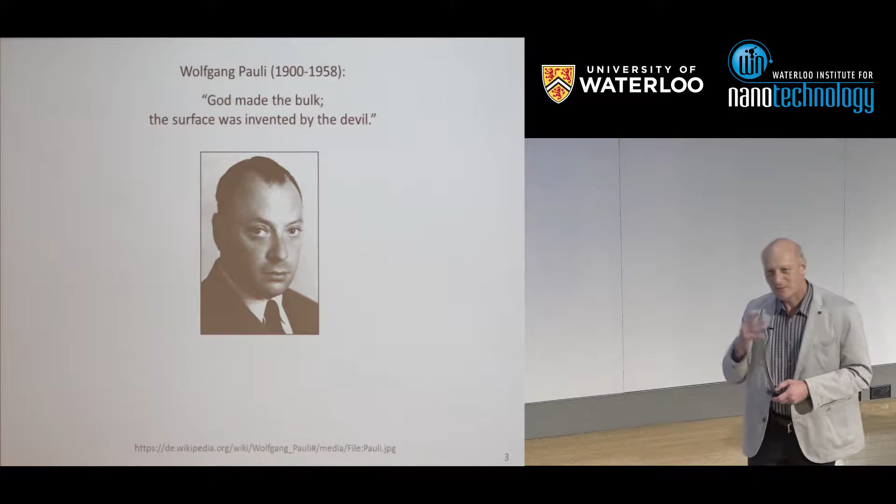So wetting is often determined by what happens close to the contact line, from the atomic range to, I would say, 100 or a few hundred nanometers.

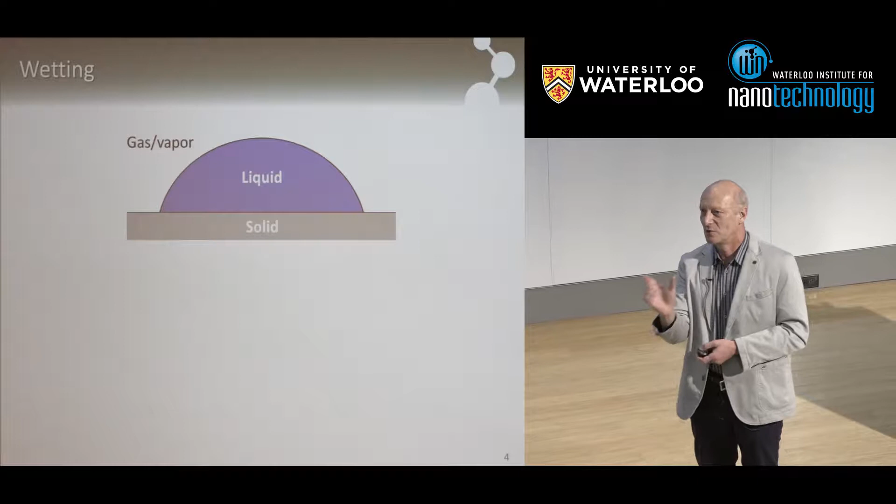Now you might wonder why, because if you think about wetting, in textbooks you will find this equation attributed to Young, which is based on the experience that if you take a surface and place a liquid drop, and if you take the same material, flat and smooth, and place the same liquid, then roughly you get the same something like, which is called the contact angle, the angle between the solid-liquid and the gas-vapor interface. So that is something which experience tells us, at least roughly.

If you do the thermodynamics, you'll find that this contact angle is in a very simple way related to the interfacial tension of the liquid and the interfacial energy of the solid-liquid and free solid interface. So this is what you find in textbooks, and this is basically what all science about wetting is kind of rotating around. And this is certainly true for thermodynamic global equilibrium.

So if your system is in equilibrium, then this is it. Unfortunately, you cannot even measure precisely this equilibrium contact angle. If you measure contact angles, it is something in the range between an advancing and a receding contact angle, but there is no way of measuring the equilibrium contact angle without certain assumptions, which is a pretty bad situation. This is one of the fundamental equations in surface science, but there are two things which you cannot measure.

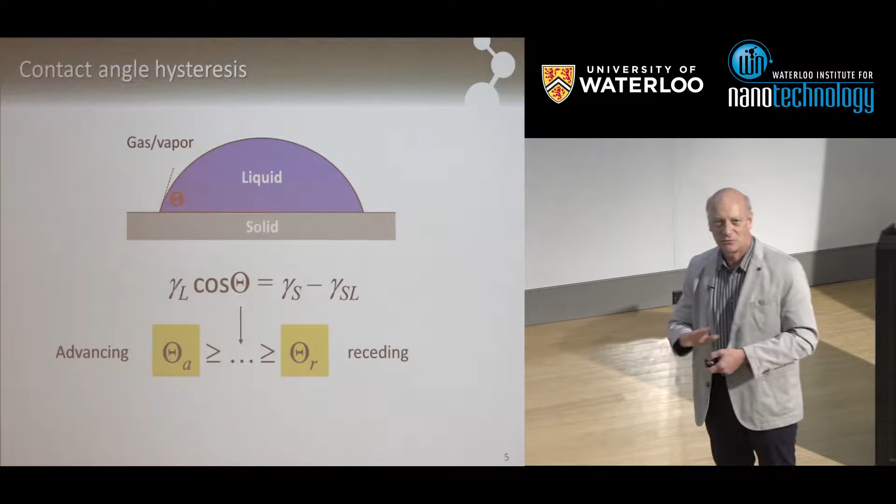Now, this wouldn't be so bad if the range is small, but typically the range is like 20 to 30 degrees at least. So even on very smooth materials, you will not get below 10 degrees, I would say. So the range is huge, and you cannot measure the equilibrium contact angle.

That's kind of nasty. So this is one way of measuring it: you take a drop, put it on a tilted plane, and wait just before it slides down, measuring advancing and receding on the front side and on the rear side. This is how it's done. This also depicts where the contact angle difference may become relevant. In fact, the larger the difference between the advancing and the receding contact angle, the more the drop resists sliding.

So if you think about drops on a windscreen or glasses, you would think, oh, this is really nasty. Not only does it spoil all our theory of contact angle hysteresis, but it would also be nice to have these drops just sliding down so you have a clear view.

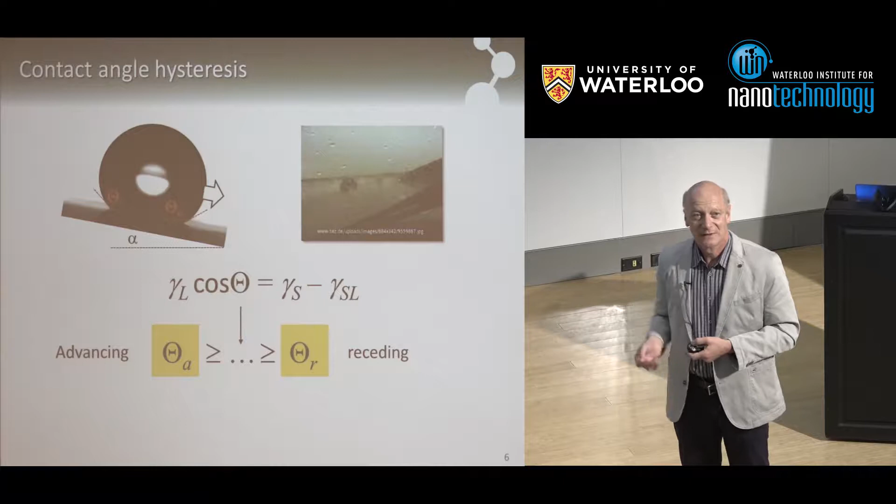However, if you think about all those phenomena in life and industry where wetting is important, you'll find that for many applications it's really desirable to have a drop not sliding. Think about printing, painting, coating, or bringing out herbicides and insecticides. In most of these cases the absolute contact angle may be relevant, but what's even more relevant is the difference between the two.

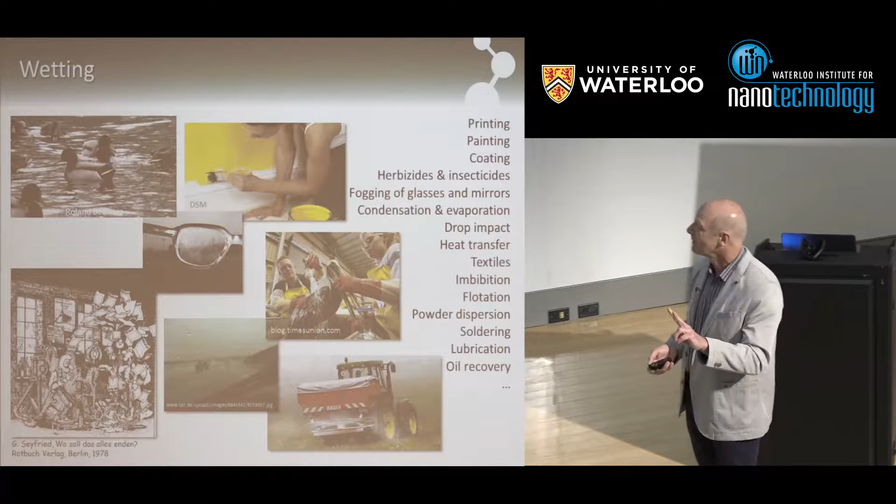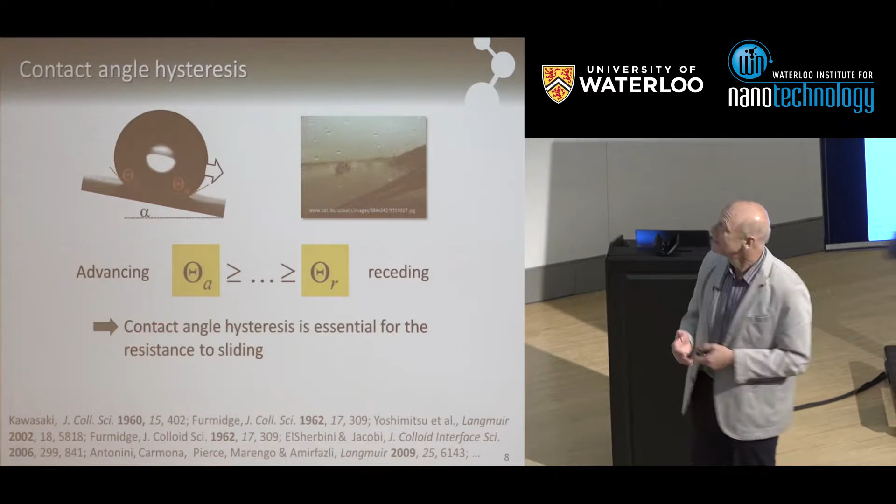Coming back to this situation, it's a nuisance that we cannot determine the equilibrium contact angle and cannot make use of Young's equation as we'd like. But in reality and in nature, the difference between the two contact angles is probably even more important than the equilibrium contact angle itself. So contact angle hysteresis is essential, not just a nuisance, for our life and everything surrounding us.

Maybe I should go one more slide and compare it to friction. So contact angle hysteresis is providing something to drops which friction provides to solid surfaces.

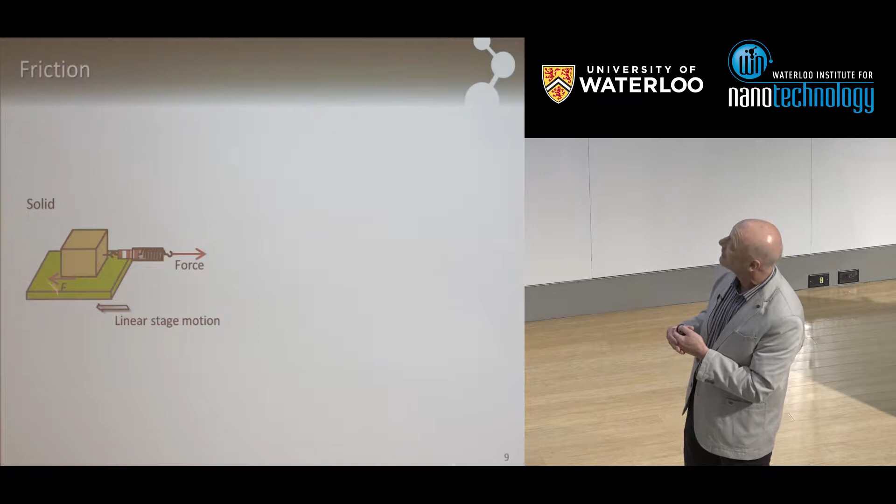I guess you all remember this boring experiment from school, where you place a solid block on a flat surface and start pulling on the block until it starts sliding. So there's a surface, and in this case we start sliding the surface. The block is attached to a spring, so you pull until a certain force is reached—depicted here, force versus time. You start pulling, and at some point the block starts moving, then the force decreases and comes into equilibrium. This is one of these 300-year-old friction experiments.

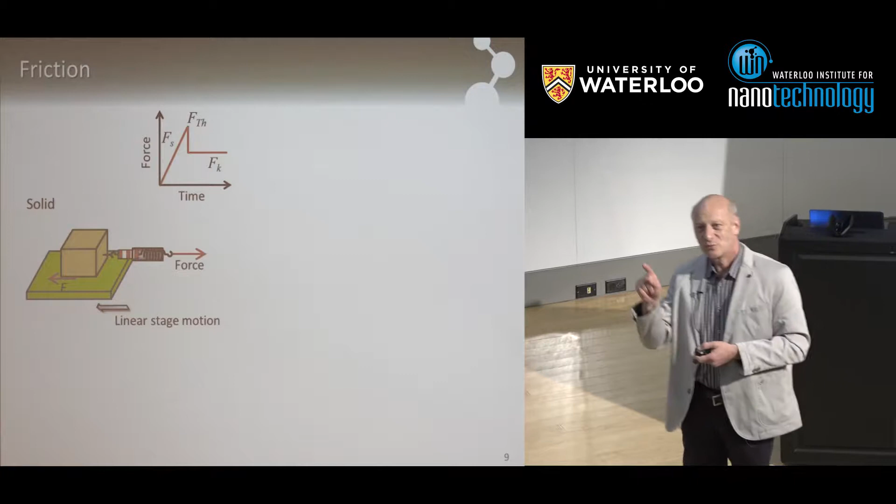Again, I guess you'd agree this is relevant for everyday life—without friction, life would be very different. But there is a difference between static friction and kinetic friction. This is what electronic braking systems in cars are based on, so that you use this peak and don't get into sliding.

We did the same experiment with a drop, because there are many similarities between sessile drops sitting on a surface and solids. Dominic Pilat, during his PhD and Nan Gao as a postdoc, did a very simple experiment. He took a flat surface, placed a drop, and kept it in position with a capillary spring. You start pulling on the surface, and at some point the drop starts sliding, and we measure the force with this micro capillary. The result is what we expect: force versus time, you start pulling with the drop, but at some point the drop starts sliding, and this is determined by the advancing and receding contact angle. That's what theory says.

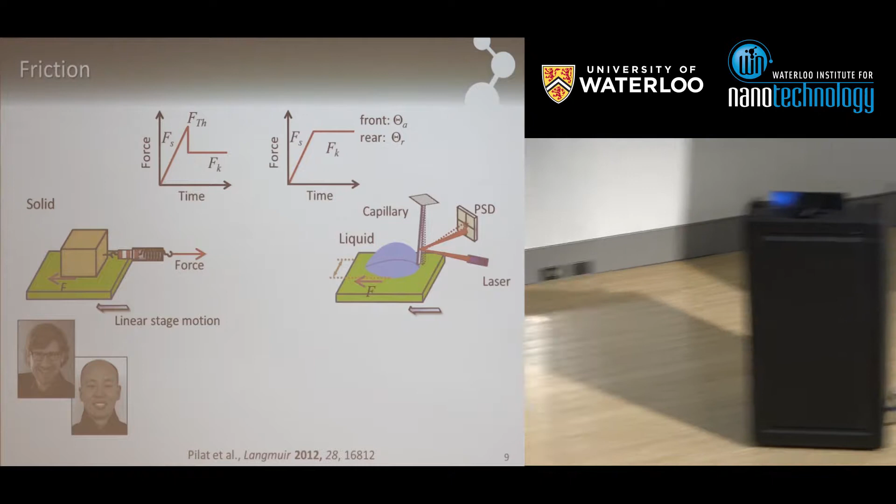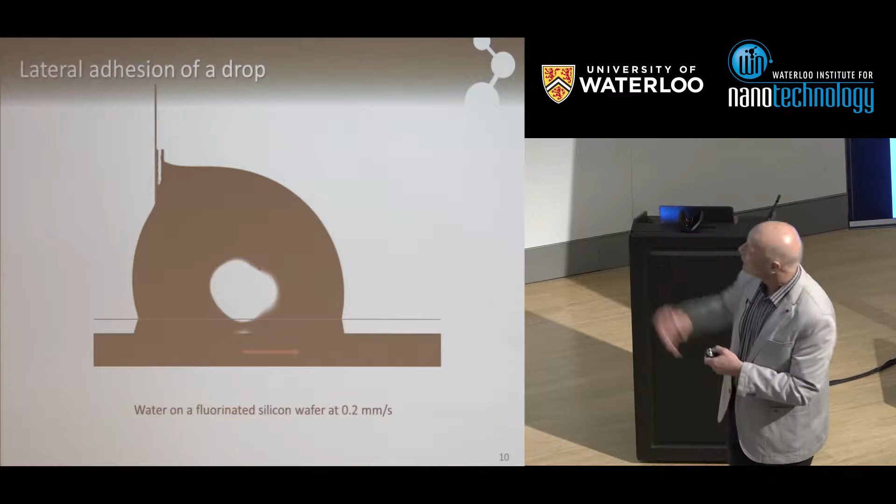Then we did the experiment, and I must admit I was even ashamed doing such a simple experiment. Here's the drop, here's the solid surface which we move in this direction, and here's the micropipette—this green thing is only a reference. As we start sliding, the drop is still moving with the surface, then the drop starts sliding and settles into an equilibrium position. You can see the micropipette is deflected, and from that deflection we measure the force. It's conceptually as simple as this, though I should warn you it took a year for a very talented student to make this reliably working. But the concept is pretty simple—a very simple experiment.

The outcome is plotted here: we have force and time, and like in solid friction, you see an increase until the drop starts sliding, and then you see a decrease again.

Even for drops in these very simple experiments, they don't behave as we expect. There is a static lateral adhesion or friction, and there's a dynamic part. We need to distinguish between advancing and receding contact angles, but I don't want to focus on this subtle difference. What I want to bring around is that contact angle hysteresis is important, and without contact angle hysteresis, we would have a problem with friction.

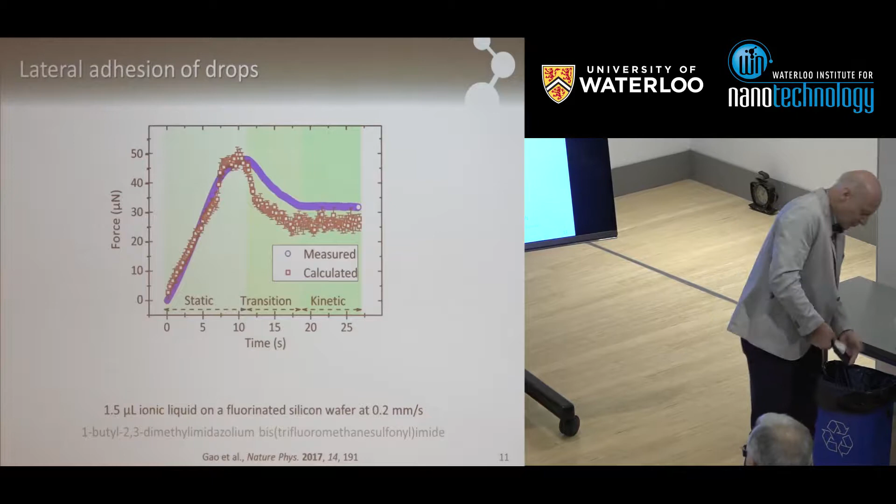Just to give you an impression of what happens, and we see this every day in the lab: the simple task of placing a drop on a surface. Sounds very simple. Here I have a surface which is, as I'll discuss later, superhydrophobic, and has a very small contact angle hysteresis. I'll pass this around so you could try placing a drop and keeping it in balance, just to get a feeling of what happens when contact angle hysteresis is low. This is not even close to zero, it's just low.

In case there's too much water around, there's something to dry it with. Please be careful so you don't spill too much on your neighbor. Maybe I can pass it here. I need this thing back because I borrowed it from the hotel.

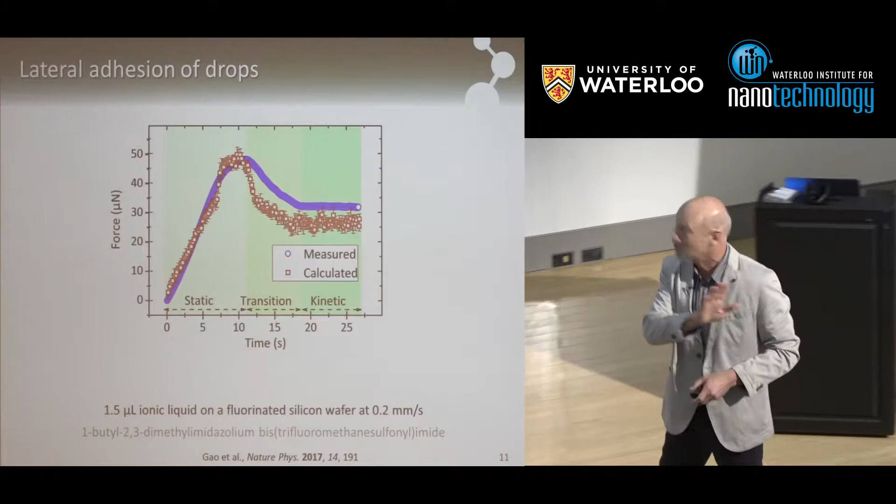So, just to give you an impression of what the world would be like if friction between liquid drops and solids is low, and this is not close to zero.

Let me make the last general remark on wetting. I started with the ideal surface—this is textbook, and I must confess even our own textbook basically stops here. For the ideal surface, using Young's equation, things are in thermodynamic equilibrium, global equilibrium. In fact, we don't need any nano here—it doesn't matter what happens close to the contact line. Young's equation is valid irrespective of the details close to the contact line or at the macroscopic scale.

Unfortunately, there's something like contact angle hysteresis, dynamics of contact angle, all these things. So there's a difference between the two, and then you need the nanoscale, because all these deviations happen close to the contact line, and we don't really know what is happening there. The main problem right now is that there's no way of looking with a resolution of 100 nanometers or better at what happens at the contact line. There's just no method of looking at it. Optical microscopy is quite good, but resolution is a few hundred nanometers, and that's not good enough. We are really lacking methods to understand more closely what's happening in this range between the advancing and receding contact angle.

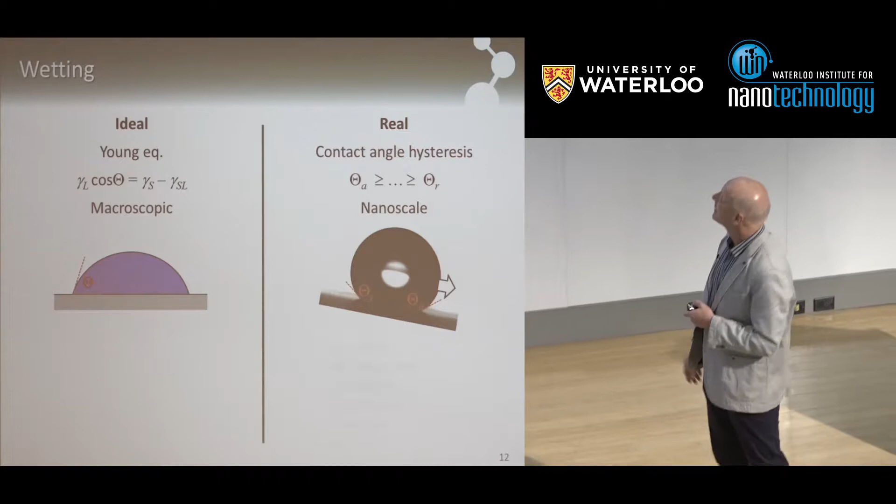People know why there is hysteresis. There are some reasons like roughness and heterogeneity that have been studied for 100 years. Right now the focus is more on adaptation, deformation, charging. Fernando is one of those people who knows best about this. It's still an active matter of research and will be for a long time.

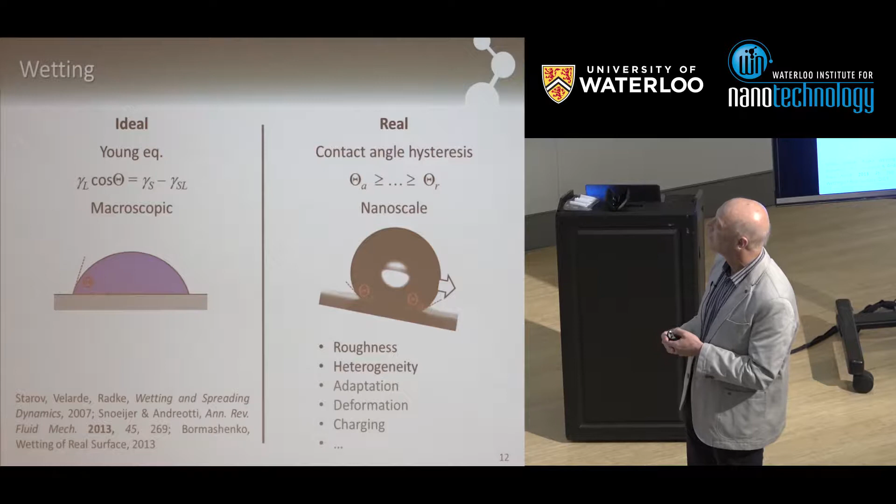Now let's focus a bit on what the title was about: nanostructuring surfaces to control wetting. Though we don't really know what happens at the nanoscale, we can still make structures and see how this influences wetting. I would like to determine wetting by making a specific surface, and in particular nanostructuring it. I'm looking at repellency because making surfaces liquid-loving is easier, particularly if you don't have water—you can make oils easily spread, so that's not a real challenge. Making liquid-repellent surfaces is more challenging.

Let me start with water. I take a flat surface, place water on top, and even if this is a fluorinated surface, the contact angle is something like 120 degrees, maybe 125, but not much larger. And it cannot be larger, for fundamental reasons.

Of course, we know there are situations where, if you place a drop, contact angles are much higher. A lotus leaf is one example. Here is another example: birds' feathers, or the fur of mammals. Birds clearly rely on the fact that their feathers don't get wet—it's completely essential. If they get soaked, they cool down and would freeze to death very fast, and they can't fly. So they depend on super-liquid-repellency, not only water birds.

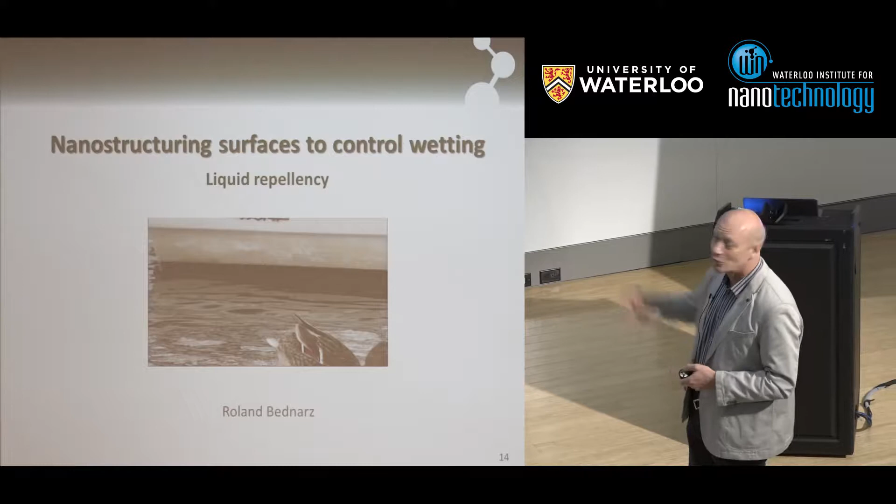People studied this effect of very high contact angles, called superhydrophobicity. The first artificial surfaces, at least which I know, are from Robert Wenzel, who took paper and coated it with a fatty acid or other organic acids, and observed contact angles of 170 degrees, so very high, almost a sphere, rolling off easily. He already speculated this is probably due to roughness.

So flat surfaces don't have high contact angles. If you make rough surfaces, they do. So he already had the idea that this roughness, quantitatively, was not suitable to fully explain this situation.

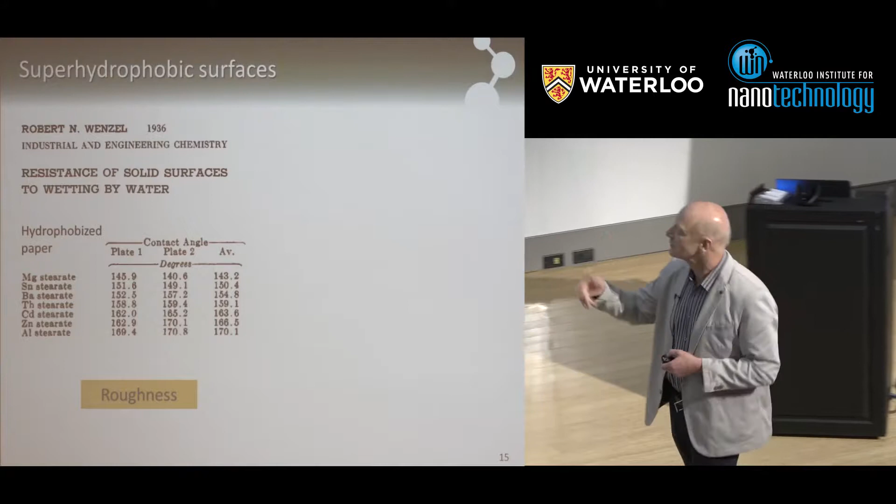Quantitatively, Cassie and Baxter came up with the right idea. The idea they had was that the liquid is not in direct contact with the solid, but the surface is structured so that underneath the drop you have some air. So basically, even underneath the drop you have an air-liquid interface rather than a solid-liquid interface. That's still the main effect.

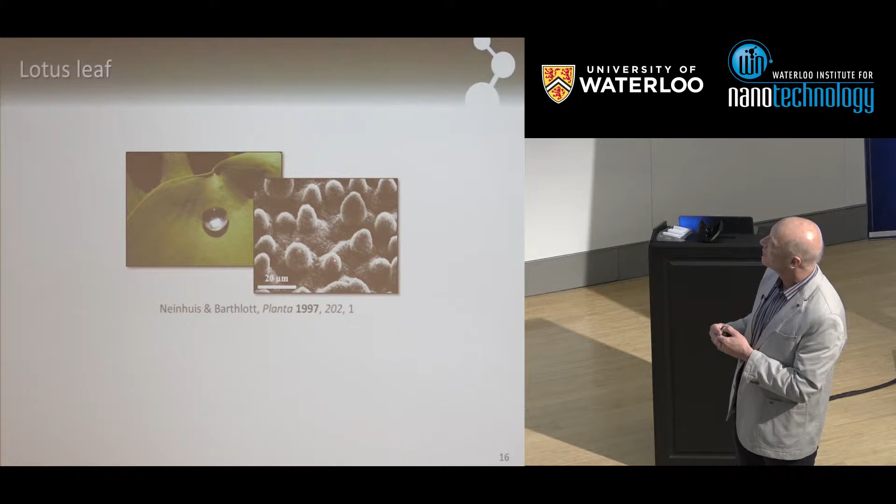You need to make a surface with protrusions, and the protrusions need to keep the liquid away from the substrate. Now we can have a look at the Lotus leaf with the electron microscope, and you see these protrusions sitting on top, clearly a kind of wax, so that drops are sitting on top of those and roll off easily. So the idea of Cassie and Baxter is conceptually definitely right.

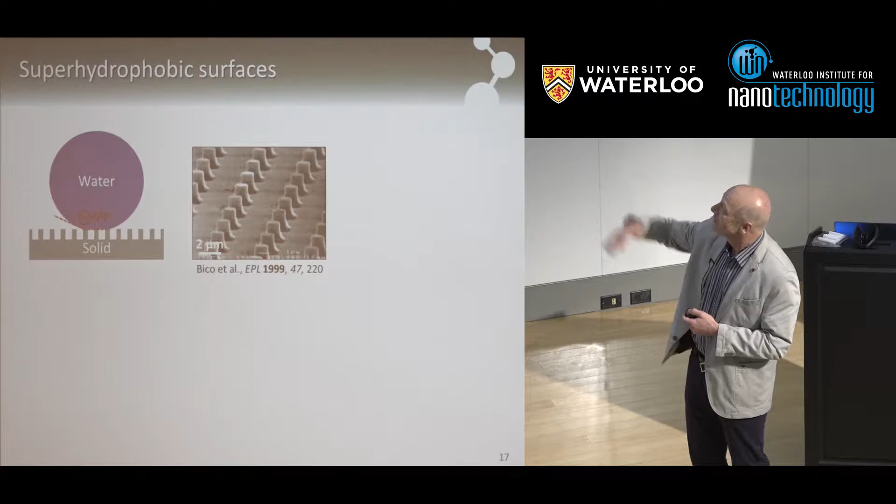Here's the standard model system. When people study superhydrophobicity, they like model systems where you can do calculations. This is from David Quéré's group. They have micropillars a few microns in size. The idea is, after hydrophobizing them, the water drop, if placed on top, will only touch the top faces but will not reach the substrate. The effect, by the way, is not due to hydrodynamic pressure, it's capillarity.

That's the same effect which holds a drop in place generally - the drop is kept at this position and doesn't fall down because surface tension is keeping it up. The same happens in superhydrophobicity: water sits on top of these pillars and surface tension kind of keeps it up. There's a vertical component of surface tension which prevents the water from touching down.

If you press on the water, applying a high hydrostatic pressure, at some point you'll exceed this angle of, let's say, 120 degrees, and water will slide down. But as long as you don't, things are fine.

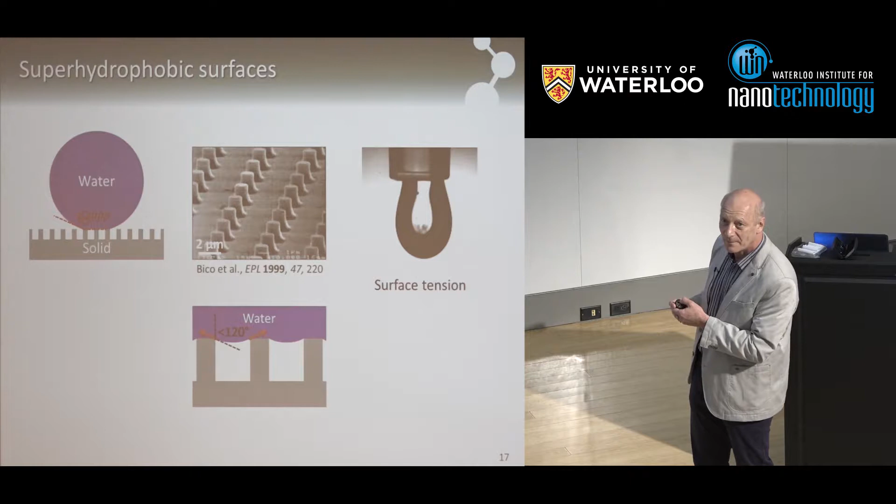Now let's be more quantitative. What is superhydrophobicity? It's a matter of definition. If you look into textbooks, people define superhydrophobicity with two criteria: one is the advancing contact angle should be above 150 degrees, and the second is if you tilt the plate, water should run down if the tilt angle exceeds, let's say, 10 degrees. You need to specify the volume of water, but that's easily done. So these are the two criteria you find in texts or reviews.

Unfortunately, it's very difficult to measure contact angles above 150 degrees. If you place a drop, you have to keep it horizontal and watch around the surface carefully - you easily make errors in tilting and these things. So it's very tricky. In fact, we started doing quantitative experiments when, in discussion with students, they reported: I made a surface, 160 degrees plus minus 5.

I complained, why are your errors so large? You have plus minus 5, while in the literature it's plus minus 1, like with normal contact angles. They said this is impossible to do better. We discussed back and forth, I complained, and they said it's not possible. But then they persuaded me that it's not possible to measure contact angles, if they're very high, much more precisely.

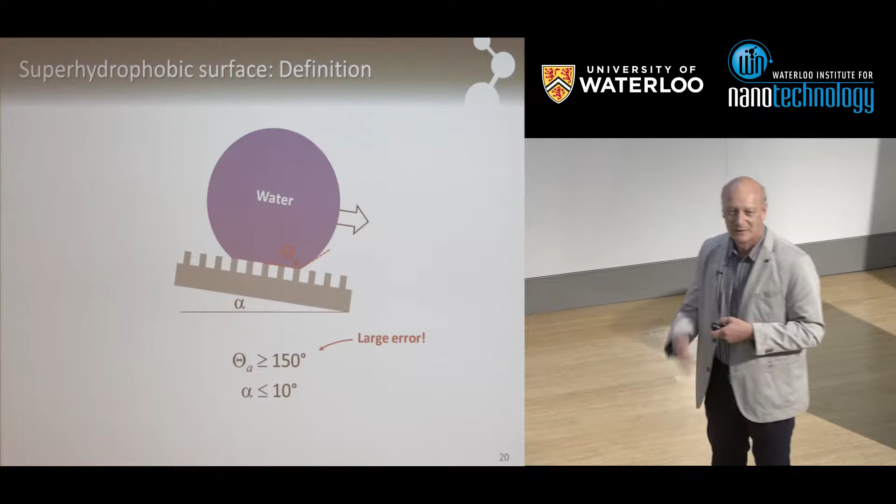And you find this even in the literature. So it's very difficult to use this criterion because it's difficult to measure. Adhesion experiments, by the way, are much nicer.

So you could do the simple experiment like the drop jumping up and down. You could take a drop, bring it into contact with the surface, pull it back, and measure the force required to pull it back. Much more sensitive, much better.

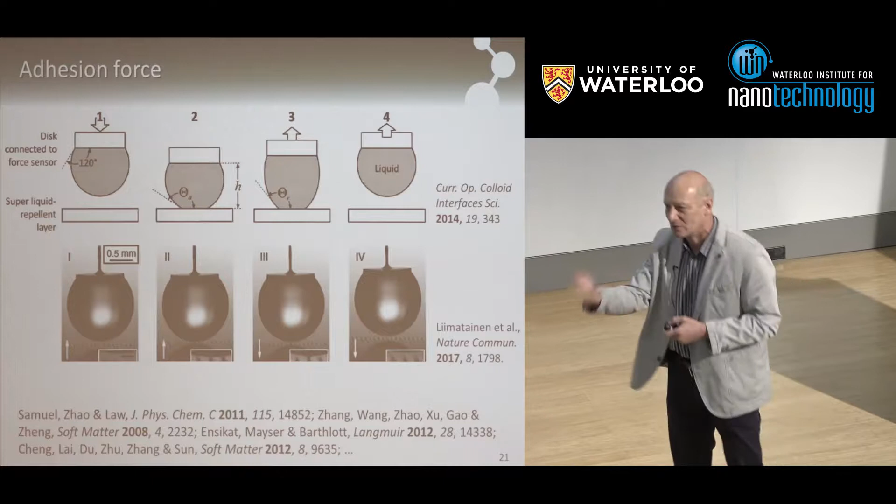Here is an example from Robin Ras. He developed a device, I think that's even commercial. He took a drop, brought it into contact with a superhydrophobic surface, pulled it off, and measured the force. From the force, when pulling back, you can calculate the contact angle, and this is a very sensitive way of characterizing these surfaces. By the way, they already go for the receding contact angle. For adhesion, the receding contact angle is important, not the advancing.

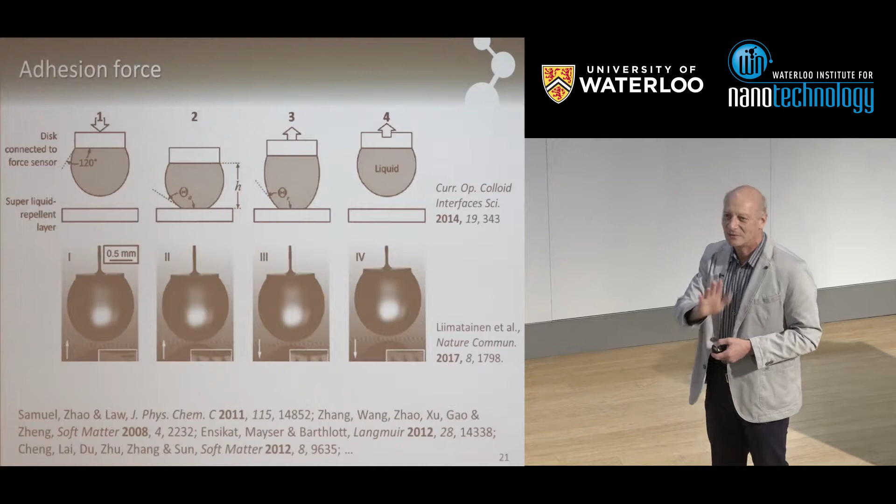This is a nice way, but not very simple. You need a special device, and the forces are low, and it's not simple to run, not as easy as a contact angle measuring device. So we were looking also for other ways of characterizing superhydrophobic surfaces.

And one we found, I wouldn't say by coincidence, but we found an easy one when asking a completely different question. The question we asked was, how does a drop advance and recede on such a structured surface? So what happens at the front of a drop and what happens at the rear?

And we used the method which is, I mean, probably the one with the best resolution you can get. That's the confocal microscope. So we look with the confocal microscope from below, and we look underneath the drop at what is happening. We used as a standard sample one of those microstructured micro-pillar surfaces, like David Quéré did, like many people do. So there's these micro-pillars, a few microns in size and a few tens of microns in spacing. Place the water drop on top, and you look with a confocal microscope from below.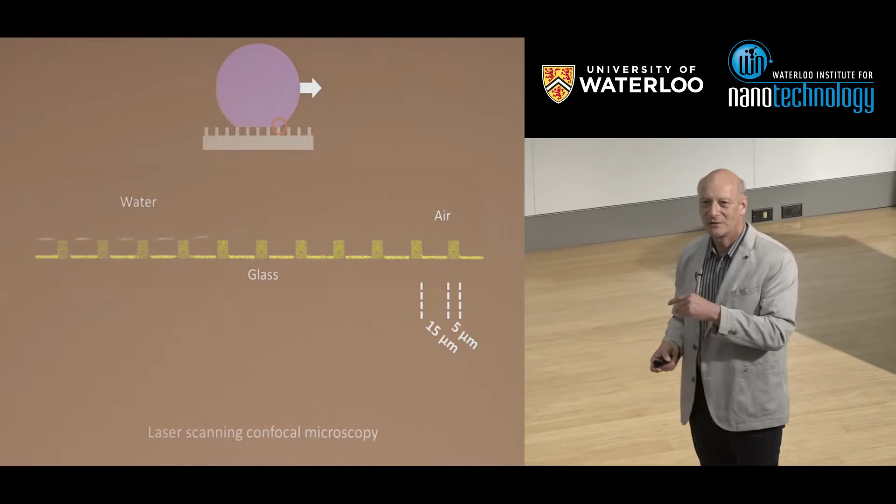In fact, we don't use any fluorescent labels. Confocal microscopy is made to image fluorescent things, but we use the reflected light, so there is no fluorescence here. What happens is the light, which is usually used to excite fluorophores, is also reflected at the glass-air interface, and that's shining yellow. These are the micropillars, but this is not a true optical image.

We placed them artificially because optically this doesn't look attractive, so we replaced the pillars by these green squares. So that's not a true optical image. What is again true is this yellow line here, which is the bottom side of the drop. And again, light is reflected when you go from air to liquid. This is why you get this reflection from underneath here. So this is the water drop, this is air.

Now maybe difficult to see, but there's also some yellow light coming up here. And of course the reflection here is higher than up here, because if you have a planar surface, then more light is reflected than if it's tilted. When you tilt, then most of the light is going away. But I hope you still can see the front of the drop.

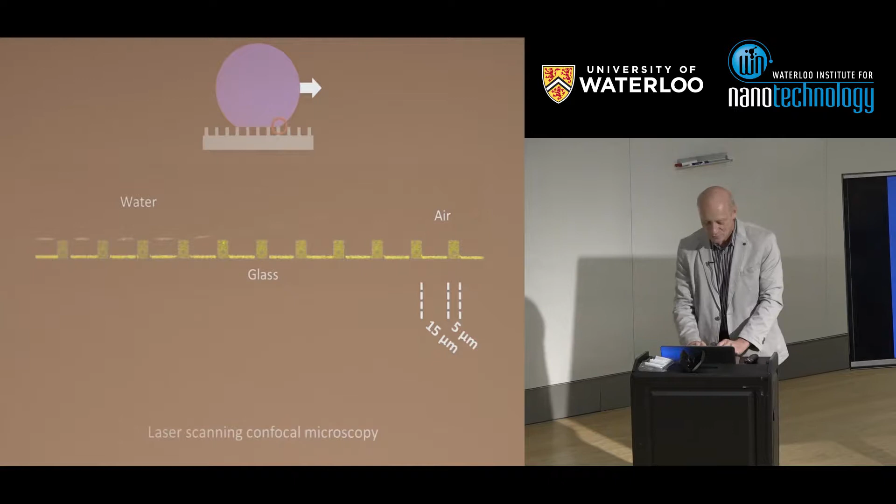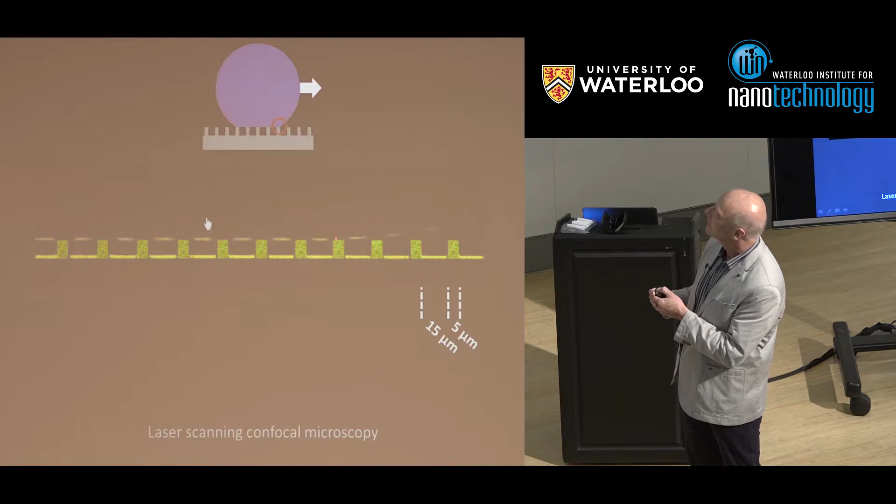Now let me try starting this movie, and then we watch from below with the confocal microscope at what's happening. Does it move? Yeah. Then you can see something not really dramatic. So what you can see is that this is gradually coming down, and it's basically touching one pillar after the other. So now this guy is establishing contact, then this one. Now this one is coming down, making contact, and so on. So this is like a wheel rolling over a surface, or a caterpillar. Not very impressive, it's a completely smooth process.

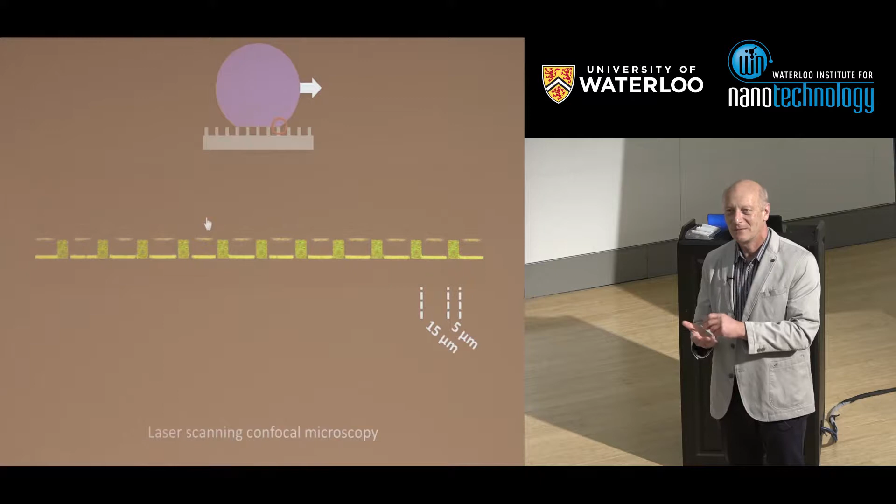This, however, is kind of contradicting what you'd expect. I mean, you expect a defined angle, and there should be some kind of instability. What's the contact angle here? The contact angle is 180 degrees. So in reality, all these superhydrophobic surfaces have a contact angle of 180 degrees on the advancing side.

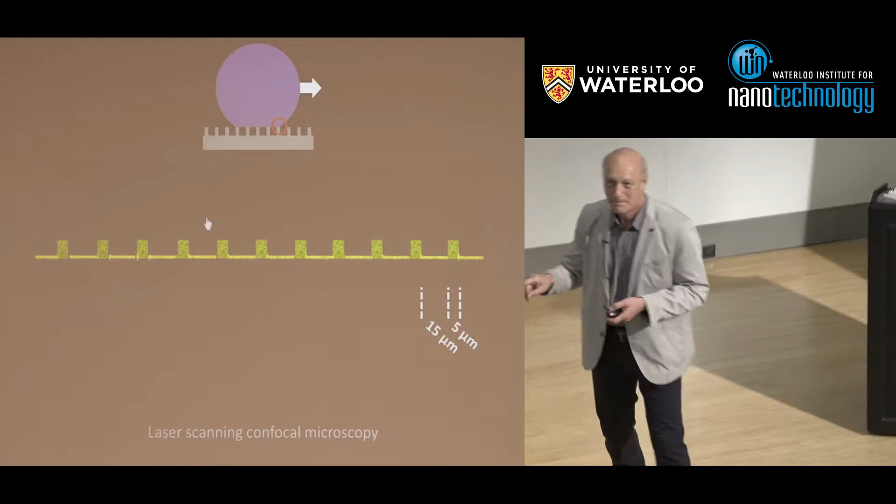So advancement is a touchdown. And if you really want to define any contact angle at all, then it's 180 degrees. And all the discussion about if it's 150, if it's 160, is kind of useless, because in reality that's more a measuring artifact, and in reality the contact angle is high.

If you look in the literature, Bartel, Chuck Extrand, and McCarthy kind of predicted this already. They studied superhydrophobic surfaces to some degree, and they predicted this.

Now let's look at the receding side, because also there they expect a smooth process. So let's look at the receding side. Can we easily turn down the light a bit on that side?

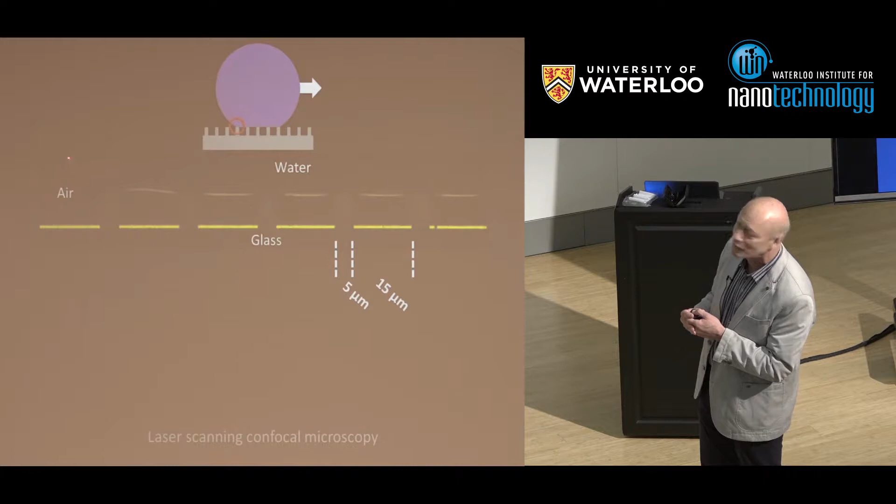Because there you should still see some yellow light coming from the rear side of the drop. It's very weak, you will see it better when it moves or when it jumps. So that's not so bad if you don't see it now. Now let's get this moving.

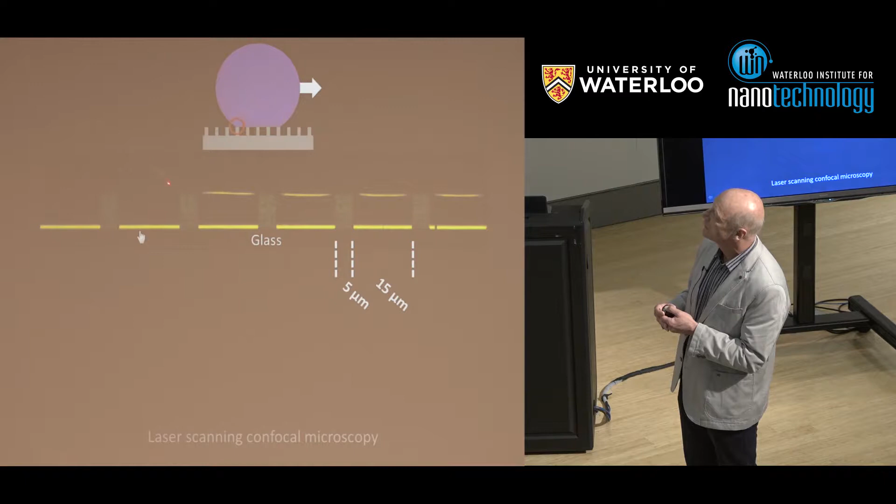Okay, now we're looking at the rear side, and there's supposed to be one of the interfaces. At some point, when starting to move, what happens? This is coming up and up and up and up, and at some point it jumps to the next pillar. Again, the interface is coming up, so the angle becomes smaller and smaller, and at some point it just jumps to the next one.

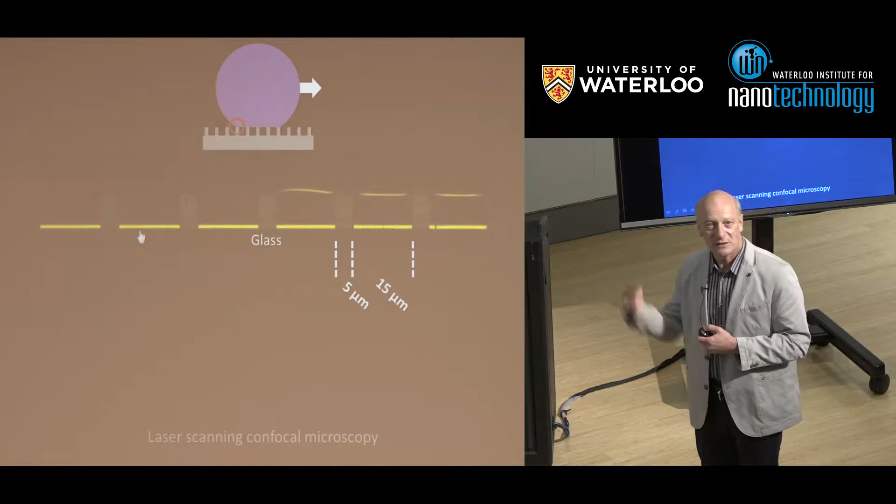In the sense of being more dramatic, this is certainly the more dramatic situation, because there's a clear instability. There's a certain point where the contact here between liquid and the drop ruptures, and that's an instability, and it happens at a specific angle. Or let's at least finish this one and then.

Question? Does the result depend on the pattern of the glass, the size between the... Yeah, it depends on the number of pillars. Let's say same chemistry, then it depends on the number and on the density of pillars. Because if you have a large spacing, then very few pillars have to support all the rear of the drop, while if you have them narrowly spaced, the force is distributed over many pillars, and then they rupture later. So that depends on the specific structure.

And this is basically kind of easy to answer your question here. So we plotted the angle versus time, and you see this decreases, and then there's a point where it can't keep the drop anymore, and it jumps to the next pillar. Decreases, jumps to the next pillar, and so on. And this kind of angle, which we call the receding contact angle, depends on the specific structure of your surface.

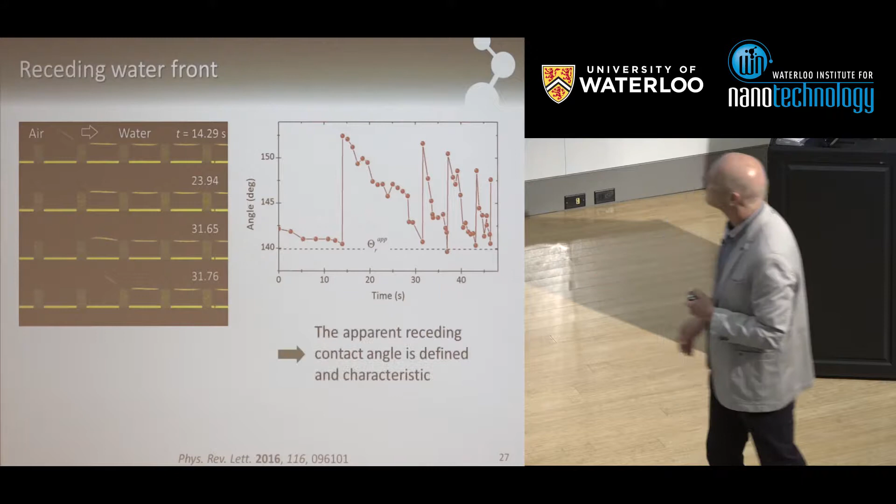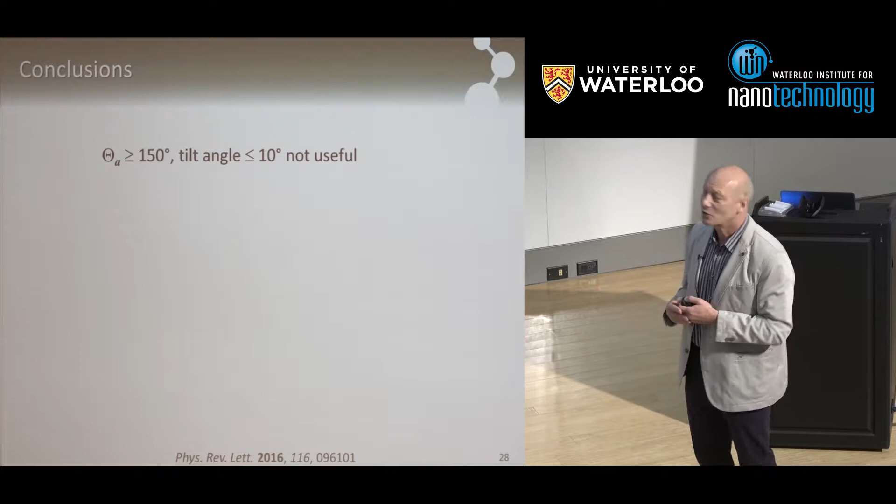So the apparent receding contact angle is defined and characteristic. So let me conclude. The first conclusion is the traditional convention that you report the advancing contact angle and the tilt angle is not really useful, because this is so difficult to measure in 180 degrees in most cases anyways. So don't use this, rather use the receding contact angle. First, it's only one number, you need only one number to characterize the surface, and second, it's easier to measure because the angle is smaller.

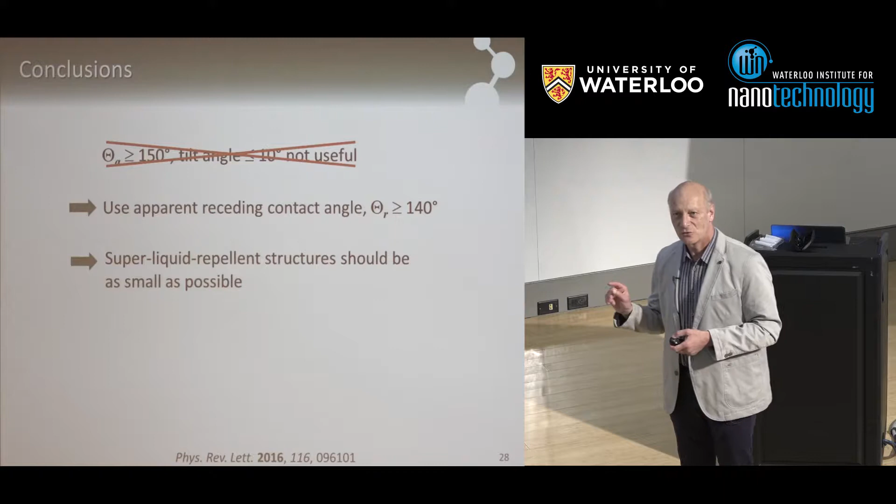Now for the next few slides, let me already make the conclusion now. What I'd like to persuade you during the next few slides is that if we talk about superliquid repellent structures, they should be as small as possible. Again, a very simple conclusion. So to make superliquid repellent surfaces, structures should be as small as possible.

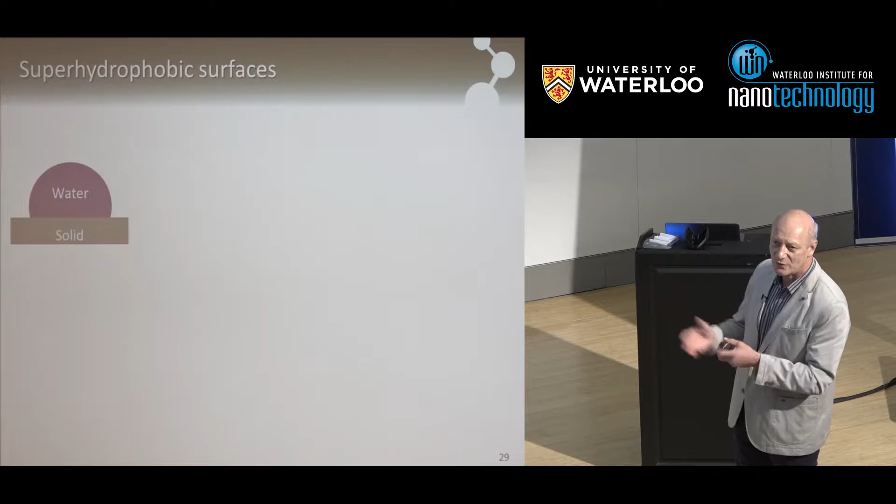And the question is the following. Let's first start with a simple thought experiment. Place a water drop on a solid surface. Let's say you are supposed to make it as repellent as possible. So you start making pillars, you remove material underneath. That's already good, the apparent contact angle increases. This is even better because there's much more air-water interface. At some point, however, this will happen.

The drop will impale the structure and all your nice wetting properties are gone. And this already shows that making a high apparent contact angle is not the whole story. You need to combine it with a high, or with a significant, impalement pressure. So high contact angle here, but do not remove so much material that it impales the structure. And these are two conditions which are sometimes contradicting in design. So it's not sufficient to just fulfill one.

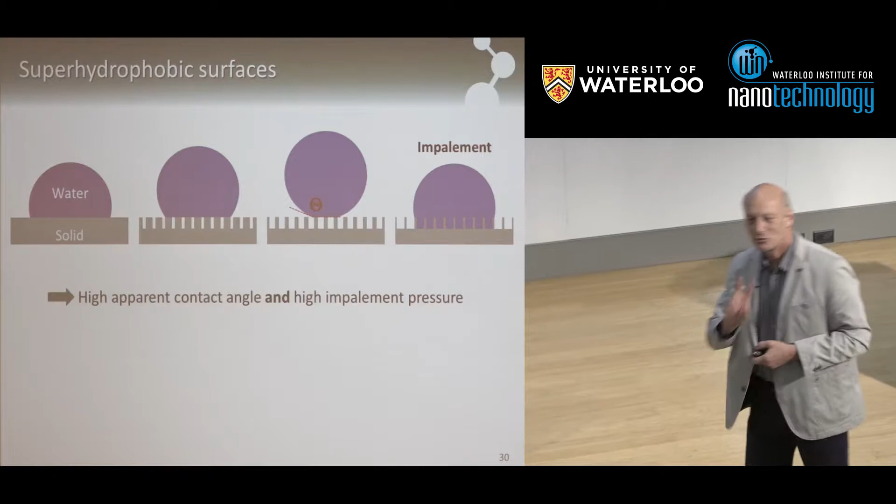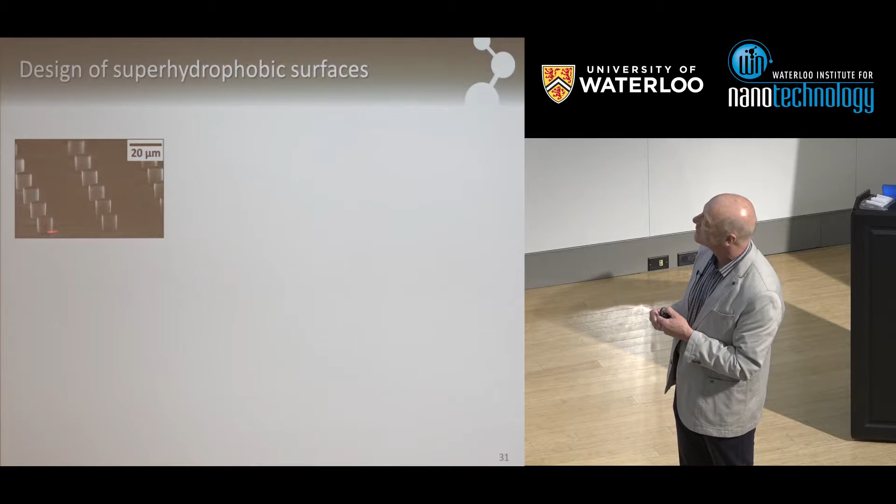So then continue this question. Let's assume we have again our micro pillar because it's the most simple one. What kind of length scale would you choose, or which kind of pattern? So let's assume you are given the task, make a surface which is as hydrophobic or liquid repellent as possible. You are able to vary the radius of these cylinders and the spacing. Which one would you choose?

You could start with, this one is supposed to be here. You could decrease the size of the pillar but increase their number. You could get the idea of keeping the number and decreasing the size. And of course you can do all mixtures. To me, at least, this was not obvious which one to choose. So we did a calculation, we did the simple calculation. So we only have two parameters. That's still very simple.

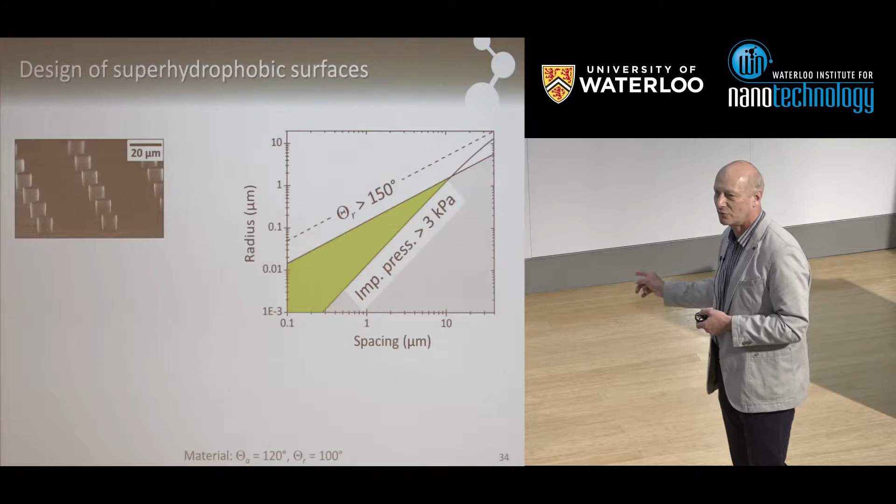And it clearly says that the structures you should design should be as small as possible. The smaller you get, the more stability you have. You definitely need spacings below 10 microns. I think this is also true for all liquid repellent structures: go as small as possible. And I think this is valid down to at least 10 nanometers. Of course, we can't make these structures, but at least that's a guideline.

So superhydrophobic structures should be as small as possible. I should mention Chuck Extrand had a similar idea already 10 years ago. We just made it more quantitative.

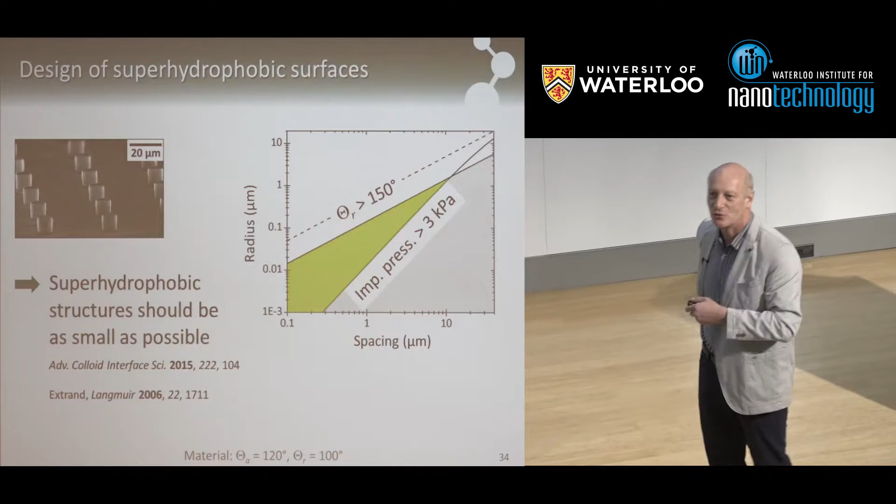Now let's get back to the lotus leaf. This is a bit surprising. If you look at the lotus leaf—this is now a lotus leaf from our botanical garden, at least the electron microscope images are from our botanic garden—you see these structures, but those are micron structures. So this is 20 micron spacing, which is not very good. But then if you look more closely, you will see that the surface of those protrusions is covered with these nanoscopic structures.

So nature had realized that they need small structures. They made this kind of compromise, and you may ask, why do they have then the microstructures? This should be sufficient. It's probably not sufficient for mechanical damage, because you also want to prevent mechanical damage. One reason of having those protrusions—there are other reasons as well—is that if you damage this thing, if you put something on top, you may damage the top plates of these micro protrusions, but underneath you still have an intact surface.

So the real challenge for making superliquid repellent surfaces is to combine all those things: high contact angle, high impalement pressure, and mechanical robustness. This is by far not trivial and definitely not solved. If you also want good optical properties, then things become even more challenging.

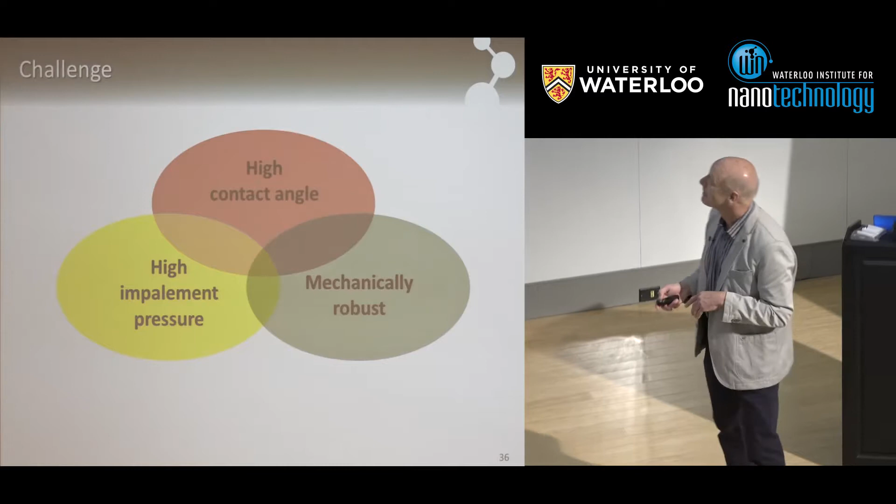Now let's go from water, which has been done a lot—and water is easy because of the high surface tension—to oil. You know that superhydrophobic surfaces are not resistant to oil; like the feathers of birds, immediately spoiled by oil. There's no way. The reason is that oil has a lower surface tension, so if you place it on any flat, homogeneous surface, it will form a small contact angle, definitely not above 90 degrees, and water is always above 90 degrees.

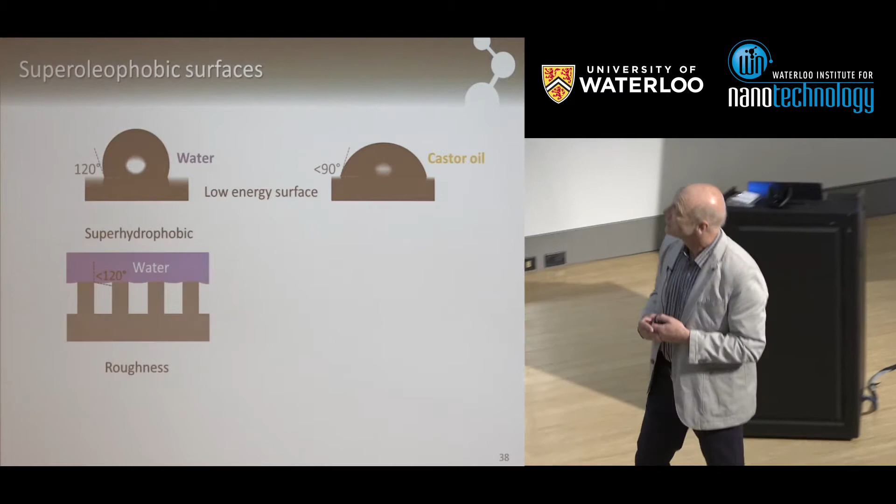So rather than making pillars, what you need to do is make structures which have an overhang, and that's of course more difficult. Making structures which have an overhang rather than just 90-degree flanks is more tricky.

And this was realized by Stefan Herminghaus, for example, and practically then realized by McKinley, Rob Cohen, and these people. Now that's of course more demanding. Examples are shown here: there's, for example, these tabletops done lithographically. Electrospun fibers work as well, although not as good—the idea is, if you have a fiber, then the liquid can hang from the fiber, which partially works.

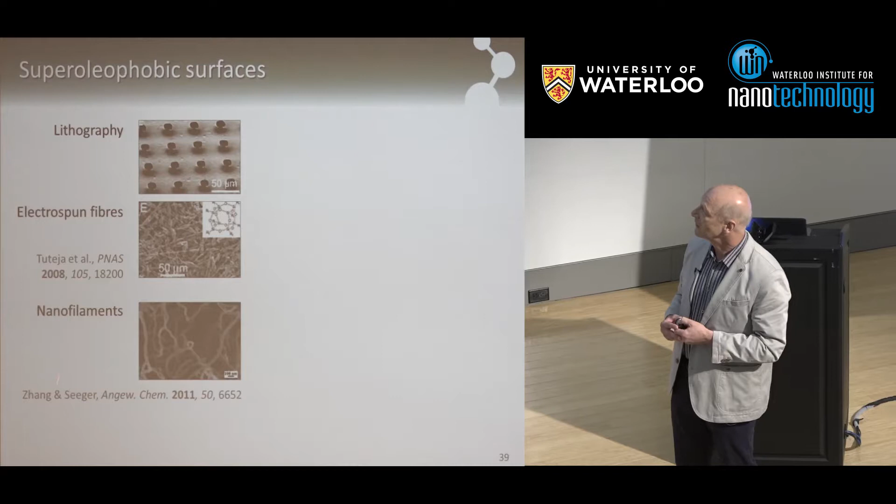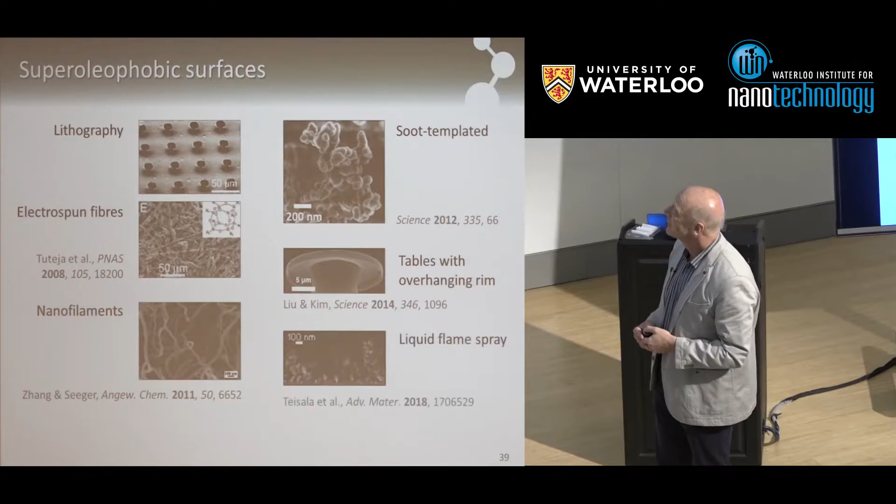Nanofilaments are much better; they are done by the Seeger group in Zurich. We have these soot-templated surfaces which work nicely. There's this Korean group making these tabletops with one or two more overhanging structures. And then recently we saw that these liquid flame spray structures are also very good for making oleophobic surfaces. Currently we use those three, depending on what we need—better wetting properties, higher impalement pressure, or more mechanical resistance—and what is easier available. So there's now a number of ways of making oil repellent surfaces.

Now let me talk briefly about a few possible applications, or what this could be good for.

This is one example, from Volker Mailänder, Susanne Schöttler, and Katharina Landfester's group in Mainz. We tested what blood does to these superoleophobic surfaces. This is a metal grid which we coated with one of those coatings. Volker took his blood, poured it inside, and we stored it for 24 hours at 37 degrees. Afterwards, you could just pour it out, and all the blood came off, leaving even no detectable protein behind, which I think is pretty remarkable. So these surfaces are really liquid repellent.

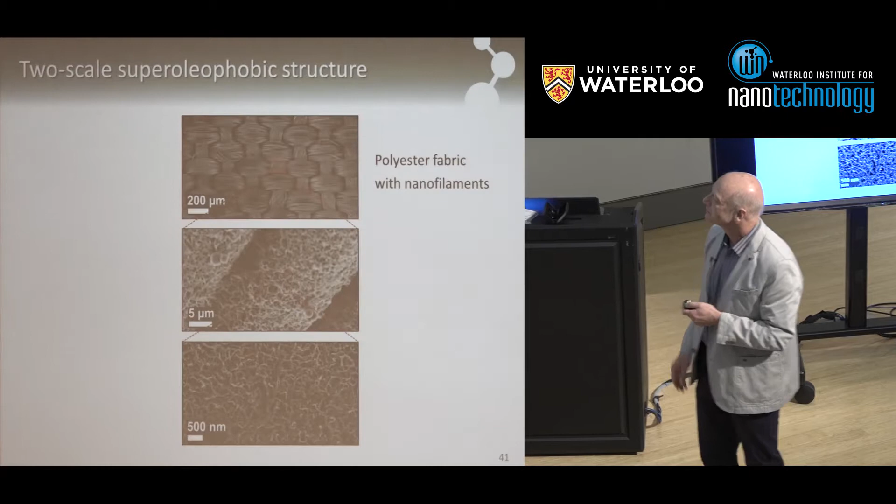Another example is this textile I passed around. This is a normal polyester fabric which we bought in a department store, and we coated it with these nanofilaments. You can see the fibers coated with nanofilaments, nicely liquid repellent, and we use them for gas membranes.

I guess one of the big challenges for mankind is that at some point we need to recapture CO2, at least when energy is produced. One idea is to use membranes where CO2 can pass into a liquid which absorbs and enriches it, so it can later be taken out and stored. This is done with ethanolamines. Such membranes are not yet widely used, but this is one of the ideas around.

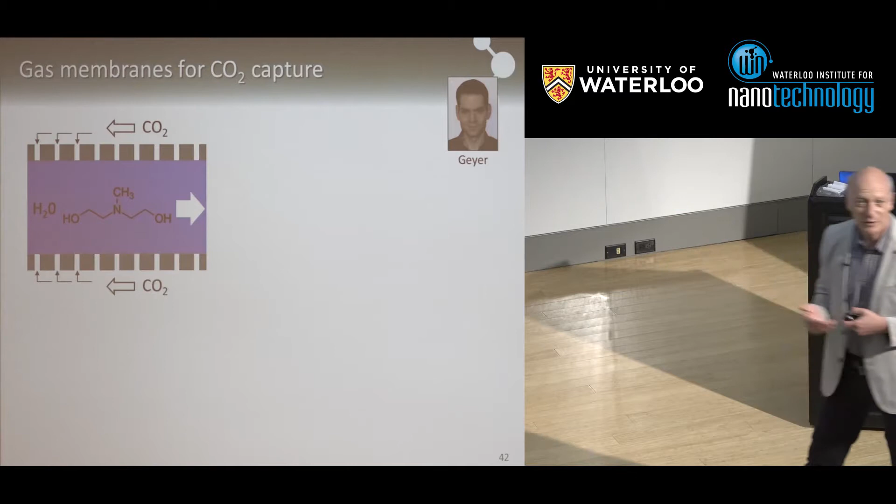So we thought we could make super-amphiphobic membranes and maybe help improve efficiency or longevity, prevent biofilm formation, all these things. These membranes, as you saw, at least for water, are very liquid repellent and also mechanically stable, so you could step on them. We can make the test afterwards, and they keep their liquid repellency.

Florian Geyer did a test with CO2 exchange, and even in the first experiment, he showed that CO2 absorption through our very simple textiles is more efficient than on commercial membranes. This shouldn't be overinterpreted, because the geometries of these membranes differ. But if in the first trial the efficiency is already higher, that's at least promising and stimulating to continue in this direction. Such things may be used for gas membranes because they can keep open pores with higher stability than traditional membranes. That's one possible application.

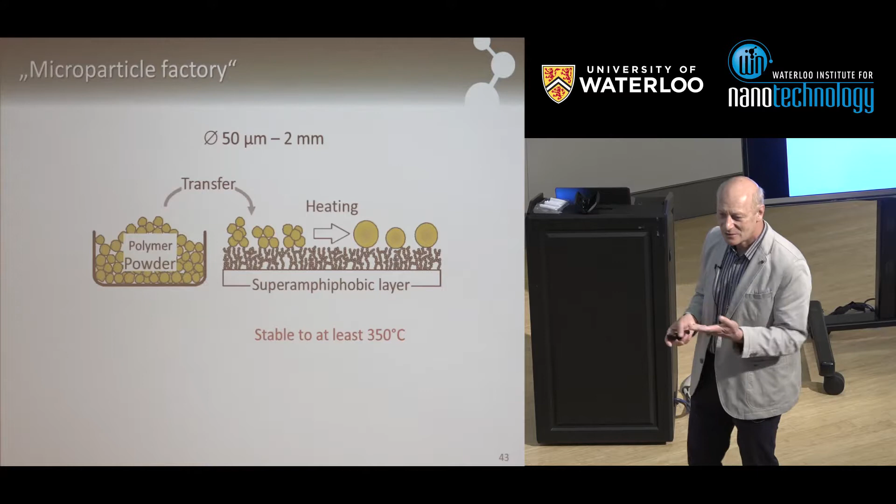Now, for the last few minutes, I'd like to discuss what we call the microparticle factory. We're not that far yet—we're talking about making supraparticles, particles with a size of 50 microns to 2 millimeters. The idea is, why can't we use the substrate to make materials?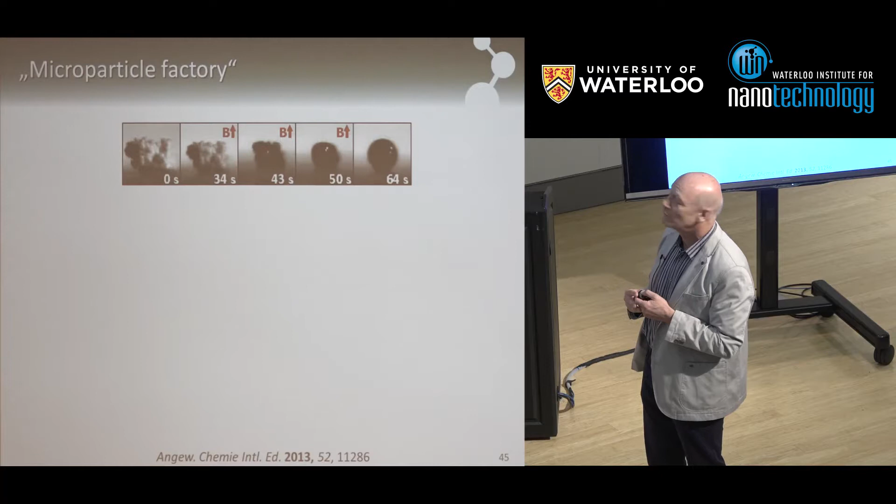That's not so impressive, but then you can add complexity. You could, for instance, mix the polystyrene with some iron oxide, and while heating, apply a magnetic field to get magnetic particles. To demonstrate this, here's the next movie.

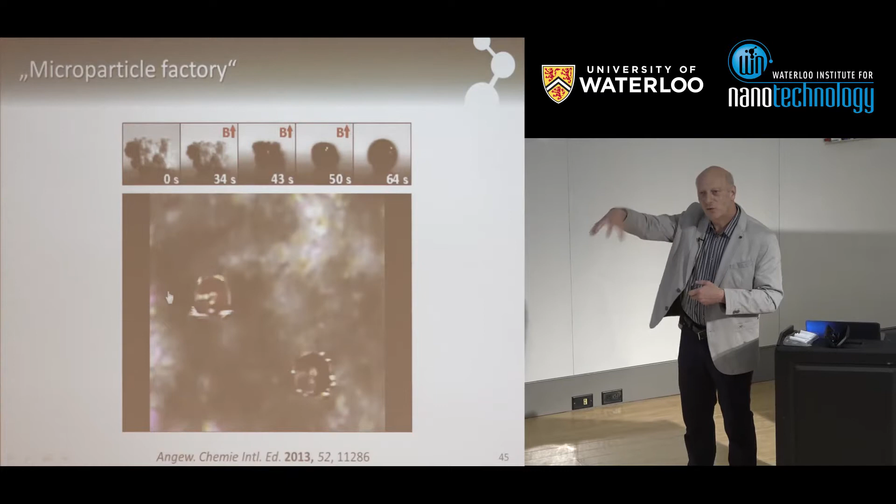Here are two particles, and you can see this one is rotating. There's a magnetic field rotating around this petri dish, and they're floating at the air-water interface. This particle was made with an external field applied while heating, when making the supraparticle, while this one was made without a magnetic field when applying heat. So we can make these magnetic particles, adding some degree of complexity. Again, this is just playing around—don't complain that they look dirty, we artificially added some dirt so you could see it's really rotating.

Let me go a bit more systematically. You could take, for instance, two liquids, let them react on the surface, and after applying temperature, UV light, vapor, whatever, you can then collect these particles. So you could really make particles—maybe use them for chromatography by making porous particles, or for catalysis, as something like a replacement for spray drying. Of course, not on the huge scale.

We cannot make tons of particles this way, but this is a very defined process which you can keep going for longer. You can vary conditions, even change conditions during the process. For pharmacy applications, let me mention the work of Mano from Portugal. They used super-amphiphobic surfaces to make capsules and encapsulate individual cells inside. So there are various things you could think about.

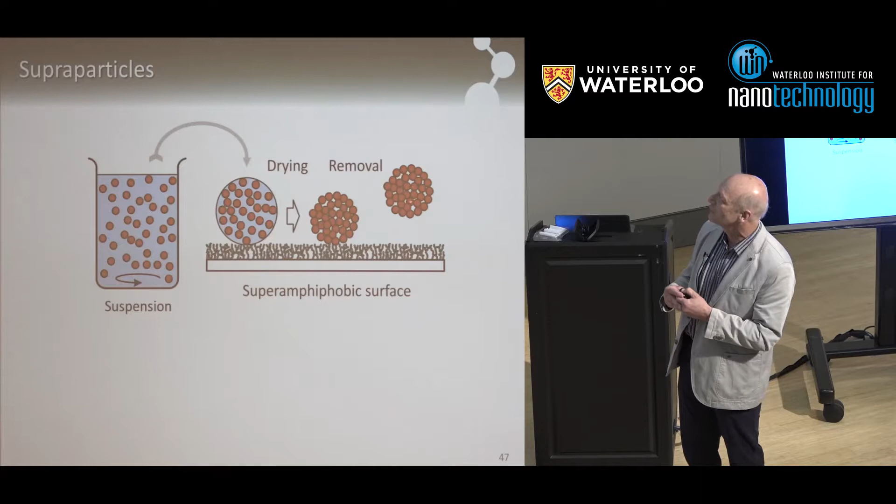Let me go more systematically and start with simple making of supraparticles. A supraparticle is a big particle consisting of small particles. The idea is to take a dispersion, place it on a superhydrophobic or super-amphiphobic surface, evaporate the liquid, and you end up with the supraparticle. You could also mix and do all these things.

We were not the first to have this idea. This is from Orlin Velev's group in 2008. They used superhydrophobic surfaces, put a dispersion of 1 micron polystyrene particles, let the water evaporate, and you can see this opalescent supraparticle. If you add gold nanoparticles, the optical properties change - you can play with all these things. This is from Michael Gradzielski's group. You can also make these donut-shaped structures, from Detlef Lohse's group, where you have crystals on the surface and can study the structure in detail. So many people are working in the field.

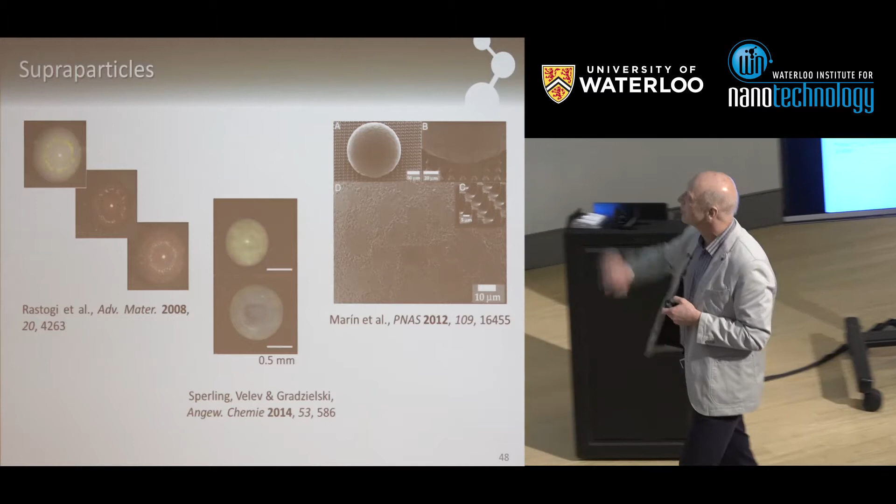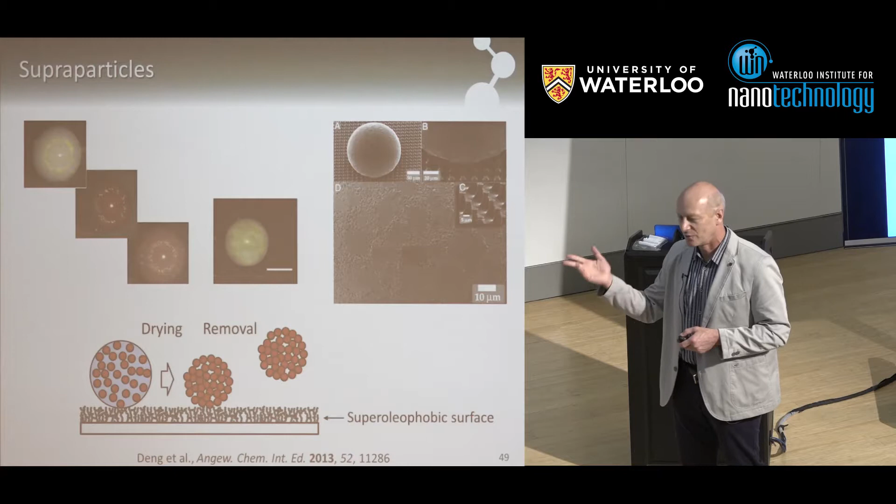We thought the advantage of these superoleophobic surfaces is that you can easily remove the particles afterwards. These fundamental studies are fundamental, but if you want to produce something, you need to remove it in a permanent way, and these super-amphiphobic surfaces are quite suitable. You don't rely on pure water as a solvent either - you can also use surfactants or organic liquids. So we went in this direction.

One of the things we did together with Syuji Fujii from Osaka: he had polymer particles with pH-sensitive surface groups. When you let a dispersion evaporate on the surface, you find that at pH 3, they form nice crystalline supraparticles. They do so because at pH 3 the particles are positively charged, so there's electrostatic repulsion, giving the particles time to find crystalline packing. At pH 10, you get an amorphous structure instead, because then there's only van der Waals attraction and the particles attract each other easily. So you can control the structure.

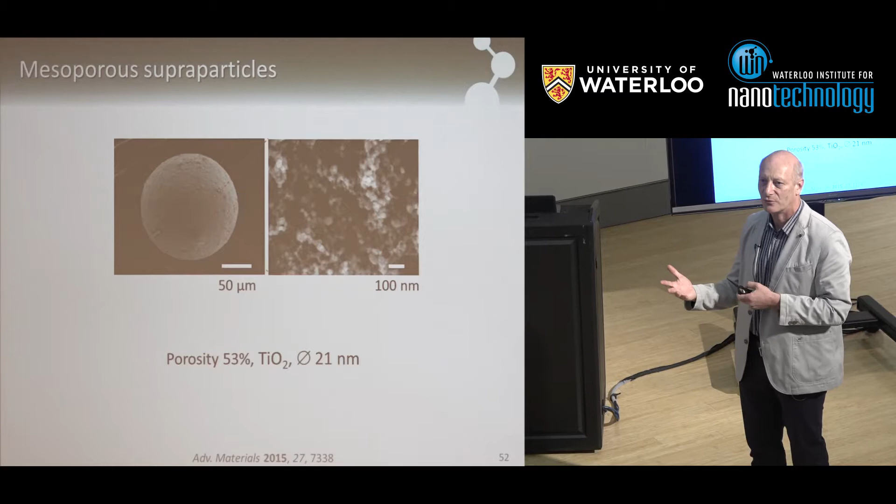Sanghyuk Wooh was interested in titanium dioxide because that's photocatalytically active. He wanted to make porous supraparticles out of titanium dioxide. He evaporated his dispersion and ended up with particles looking like this - this is the supraparticle, about 200 microns, and you can see the structure inside is pretty porous. This is photocatalytically active, so he did the following experiment.

He filled a Teflon tube with these supraparticles, because they're easy to handle - you just pour them inside. Then he had a reactant flowing through and shined some UV light. For simplicity, he used rhodamine, because it's nicely orange. After passing through this photocatalytic reaction chamber, it's completely decomposed and the solution is transparent. You can verify that it's really photocatalysis - it's a clear experiment. So you can make photocatalytically active particles.

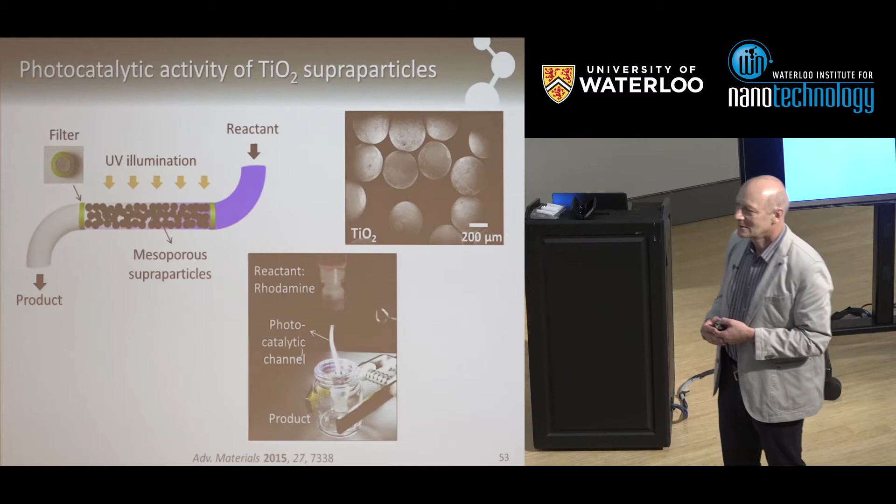We thought, how could we improve catalytic activity? Well, the immediate next step is to make the supraparticles more porous, so reactants and products can flow in and out more easily. We thought this would be easy: just mix our catalytically active small green particles with some polymer particles, form the supraparticle, apply heat to burn away the polymer, and then we have holes from the polymer, making it much more porous.

We started doing this two years ago, and for some time without much success. Then, fortunately, at some meeting I met Arash Nikoubashman from the physics department, and he said he could simulate the process. He simulated the evaporation of a droplet of a binary dispersion and predicted there must be stratification, where small particles end up at the surface of the supraparticles and big ones more in the center. I still don't have an intuitive explanation for why this happens, but there's a chemical potential gradient which leads to small particles enriching the outside and big ones going more to the center.

It's one of the few cases when Dong Liu did the experiment in our lab, where the experiment immediately confirmed the theoretical prediction. Arash needs to admit it's the first time this came out so nicely.

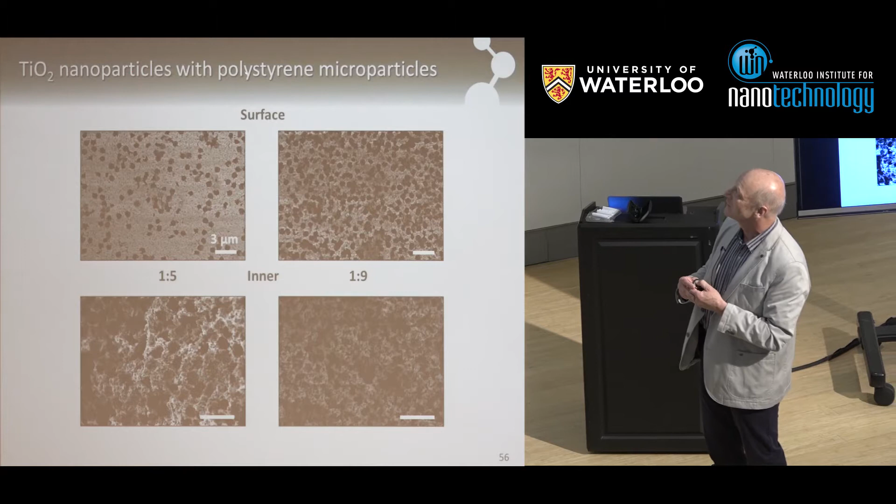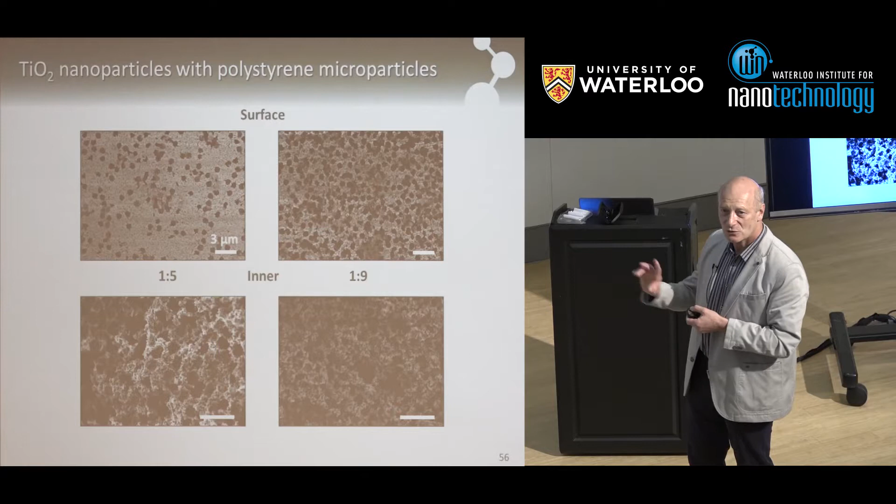Basically, you just evaporate fast, or add some ethanol and play these tricks. Then we can make porous particles. Here is the surface image, and here is the inner image of titanium dioxide nanoparticles mixed with polystyrene, but the polystyrene particles have already been burned away. You can see the high porosity of these particles, which had been made primarily with polystyrene. So now we can adjust porosity at least to some degree.

If this ends up in anything we can use at all, I would be happy. It's one direction we are following, and I think it's promising, but I don't know where this is going to end up. These are only the first steps. I think you can make more complex particles in a very defined way. We're working on making many particles at the same time.

With this possible application, I'd like to conclude. I started out by talking about the advancing and receding contact angles and how important they are. Second, they are linked to the nanoscale. If you want to understand advancing and receding, you're automatically looking at wetting at the nanoscale.

With respect to superliquid repellent surfaces, I hope I persuaded you that using the receding contact angle to characterize these surfaces is the appropriate way. If we think about superliquid repellent surfaces, the challenge is to combine high contact angle with mechanical robustness and high impalement pressure. Any single one of these is easy, but all three together is very difficult. Then I presented one example of what you can do if you understand wetting, like making supraparticles.